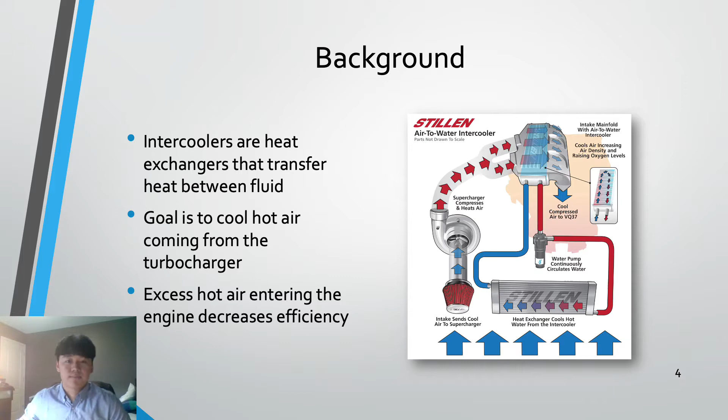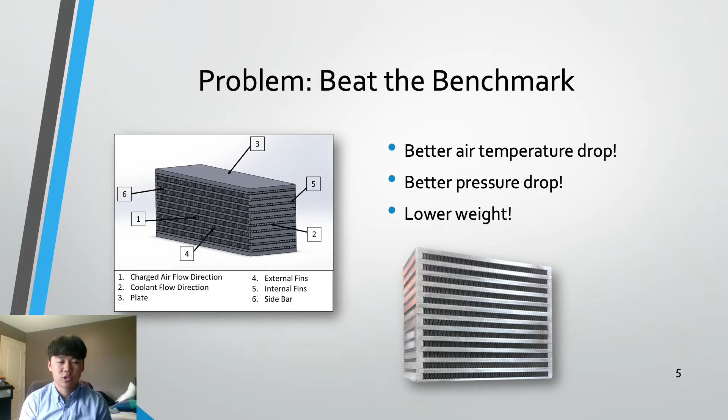The objective of this project is to beat the benchmark. We benchmarked an existing solution that's commercially available right now in the market, the conventional intercooler that uses bar and plate technology. Our goals are to design and manufacture an intercooler that can produce high air temperature drop, low pressure drop across the intercooler, and have a lower weight than the benchmark.

Additive manufacturing provides significant advantages in performance over traditionally manufactured intercoolers. In terms of manufacturability, 3D printing allows for much more complex design structures than what can traditionally be machined. Structures using lattices and other complex geometries like trusses, which have large internal surface area to volume ratios, can be designed and manufactured using 3D printing, and they increase heat transfer through a large contact surface.

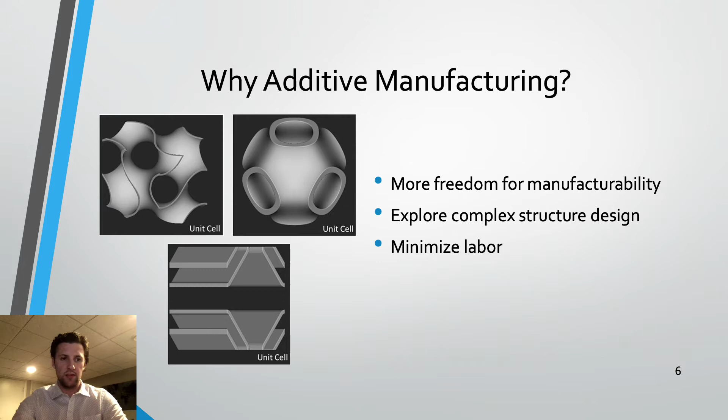The most important design considerations in our intercooler design began with the benchmark intercooler. First, the temperature drop in our intercooler had to be larger than the benchmark, and the pressure drop in the air had to be less than the benchmark. This was considered at every design decision.

The next consideration is that the intercooler must weigh less than the benchmark. Also, the form factor had to be standard, meaning the connections must be interchangeable for different vehicle requirements. Finally, and most importantly, the intercooler had to be designed for additive manufacturing, without any support structures. This last consideration is fundamentally where all the design decisions came from, and it allowed for a unique intercooler using a new technology to be designed.

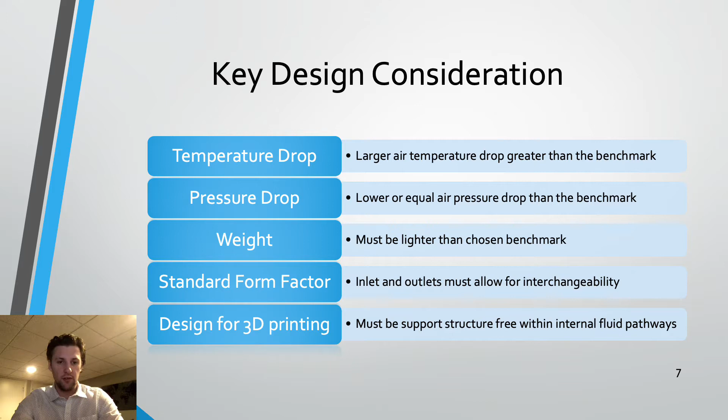Several standards pertaining to additive manufacturing and intercoolers were followed and considered in this design. The main standard followed was ISO 17296-3, which outlines common additive manufacturing processes. ISO/ASTM 52921, the standard terminology for additive manufacturing, was used in the reports, and the air side connection adhered to a turbocharger hose specification.

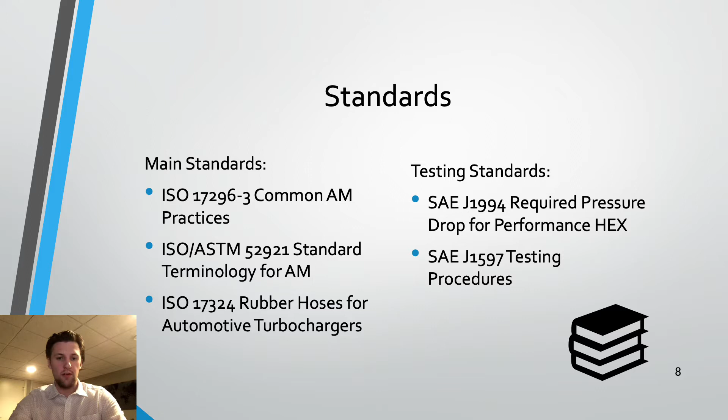On the other side, testing standards were not able to be followed, as Additive Solutions did not have access to any testing labs. However, if this intercooler is to be sold in the future or used in a vehicle, these testing standards must occur to certify the intercooler.

In our design, we explored three main concepts. These concepts are lattice structures built up of different complex geometries. The fluid would essentially flow through these lattice structures, and the complex geometries would allow for maximal heat transfer area between the two fluids.

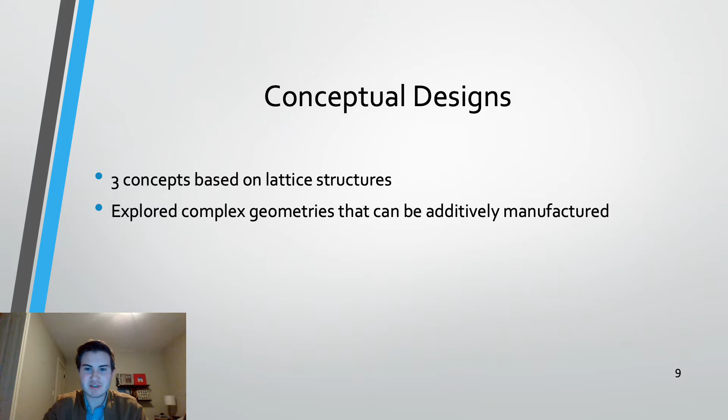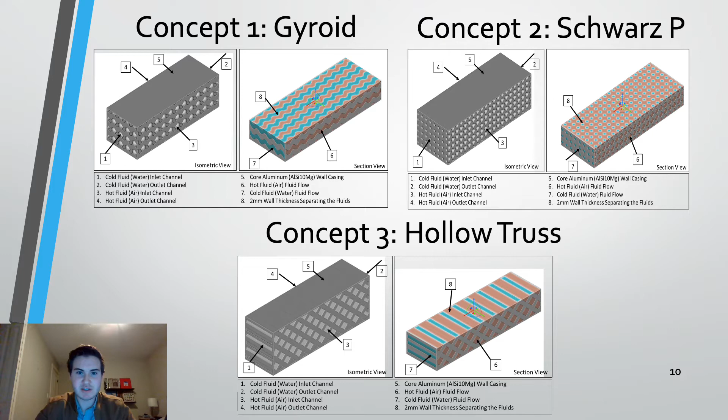These concepts are then compared based on the main performance parameters of our intercooler: the temperature drop in air, the pressure drop in air, the pressure drop in water, the weight, and the cost of each intercooler.

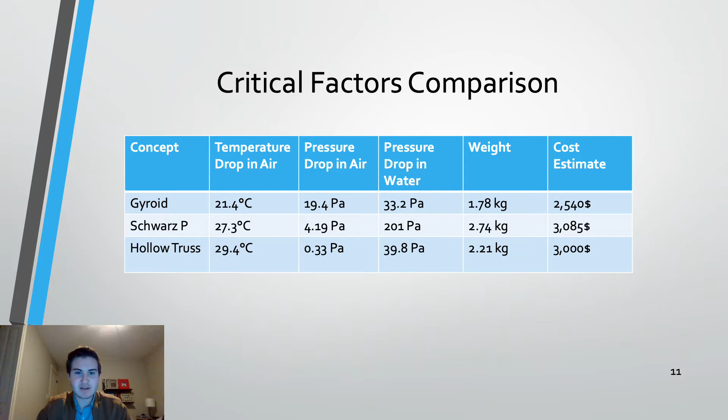These intercoolers were too big to perform computational fluid dynamics analysis on in the initial size we had them modeled in, so we decided to take unit cells of them to reduce computational time and power. The inlet conditions were kept the same, and they were all the same size. So these values are not indicative of an entire intercooler, just a unit cell, but they were good to compare the three concepts to see which performed the best.

Based on the performance parameters analyzed on the last slide, as well as other factors in our decision matrix, each concept received a score, which was tallied, and the concept with the highest score was chosen for our final design. If you'd like to look at the scoring of each concept for specific specifications, you can pause the video here.

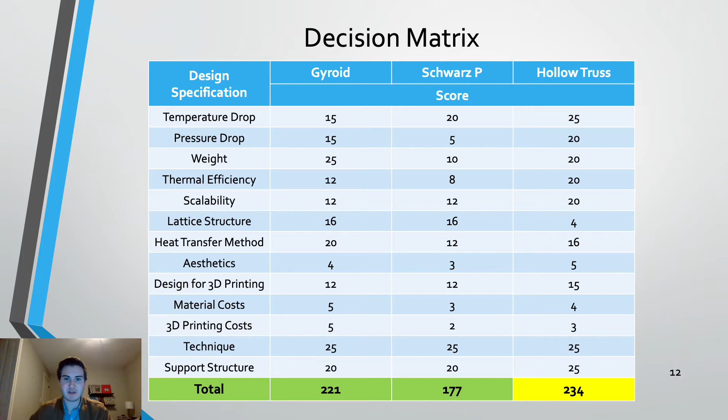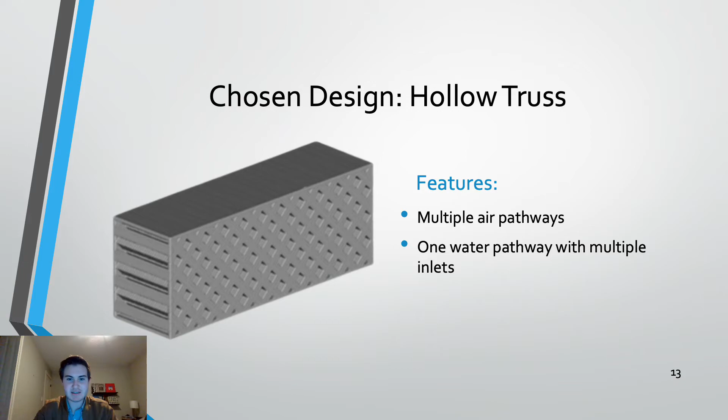Based on the scores given in our decision matrix, our chosen concept is the hollow truss concept. As discussed earlier, this concept features a cross-flow pattern where air flows through straight shot tubes surrounded by trusses, which have water flowing through them. There are multiple air pathways, but only one water pathway. Although this was our most simple concept, it scored the highest in the CFD analysis, as well as the other factors in our decision matrix.

The numbers for the benchmark were found in two different ways. First, Bell Intercoolers was contacted and they provided the size and results of one of their high-performance bar and plate intercoolers. To verify these numbers, Additive Solutions built a solid model matching the exterior size and dimensions of Bell's intercooler. Then hand calculations were computed on that model using the effectiveness NTU method. These calculations provided similar numbers to Bell, confirming the validity of those numbers.

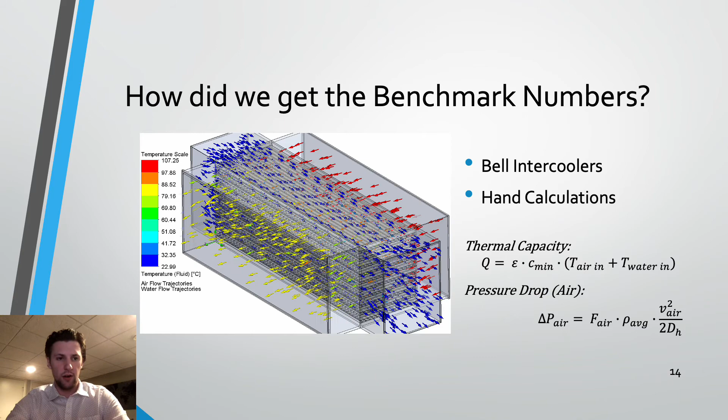From the benchmark calculations and Bell's simulation results, we found the air temperature drop was 61.1 degrees and the pressure drop was 2.61 kilopascals. The benchmark weighed 2.43 kilograms. This is the performance that we strive to beat with our own intercooler of the same size.

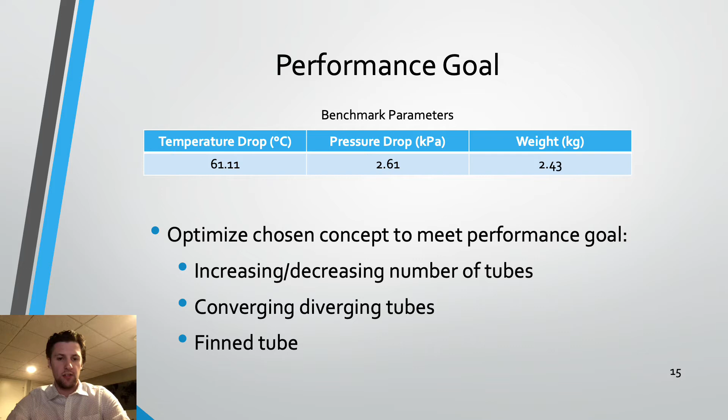To beat this performance goal, we optimized our design by changing the number of trusses for the airflow and changing the shape of the trusses, creating converging-diverging tubes as well as fin tubes in our design. These optimizations will be further discussed later in the presentation.

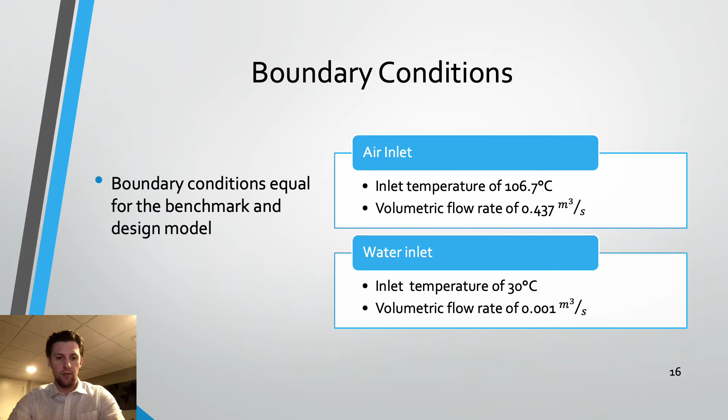In order to compare our intercooler design to the benchmark model, the boundary conditions were specified. To keep the comparison fair, the inlet boundary conditions were the same for both intercoolers. The air has a higher inlet temperature than the water because the water is cooling the hot air, and the airflow rate is a lot faster than the water's because the air is coming from a turbocharger. These conditions were also used identically by Bell Intercoolers in their results, keeping all comparisons the same.

In order to find the optimal sizing of the intercooler with the optimal number and sizing of trusses, iterations were performed on the basic model of our truss intercooler. The calculations were computed in MATLAB, and four input parameters were varied: the truss aspect ratio, and the size and spacing of the truss, for many different values across all four inputs.

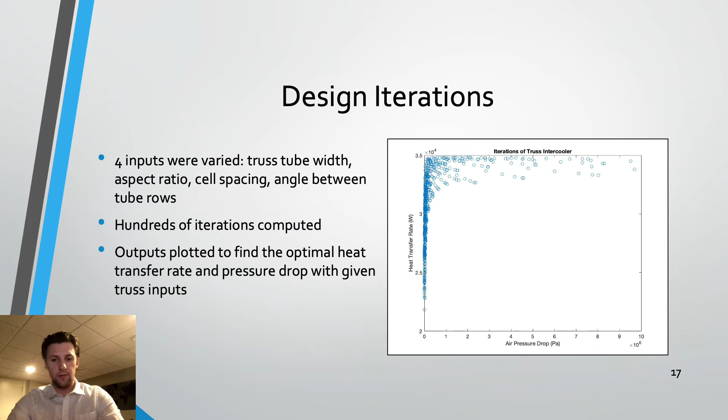The first iteration is a simple converging diverging tube. The second iteration consists of a converging tube but with an added fin inside. The third iteration consists of waves on the cross-section of the tube.

Finally, the fourth iteration consists of a converging diverging tube but with longitudinal waves along the length of the tube. These different models highlight the fact that it would otherwise be difficult to manufacture them without 3D printing.

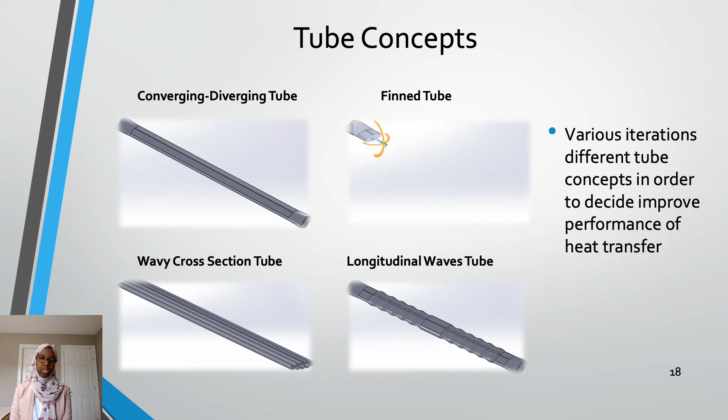Analytical solutions were not feasible to conduct on these models because of their complex shape. Therefore, CFD analysis was performed for comparison.

It achieved a temperature drop of 63 degrees, and therefore was incorporated into our final design.

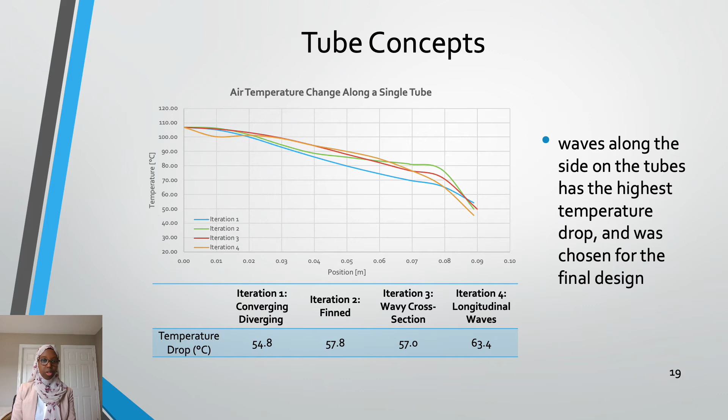Next, the pressure drop was evaluated. The transition from the inlets of the shell to the tubes creates a large pressure difference. This was minimized by incorporating converging diverging tubes into our design.

A separate CFD analysis was conducted comparing two scaled intercooler cores with the shell: the first core being simple straight tubes and the second being converging diverging tubes.

The distance between the tubes and the lengths of the tubes were the same as the optimal sizing obtained and discussed previously, in order to achieve geometric similarity.

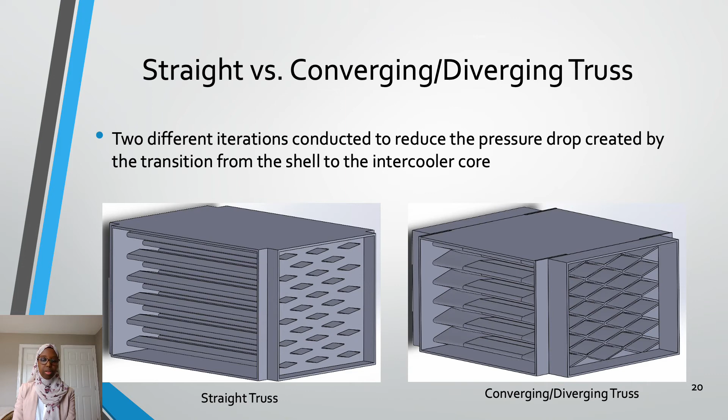From the analysis, it was found that the design with simple straight tubes had a pressure drop of 3.4 kPa, and the model with the converging diverging tube had a pressure drop of 3.2 kPa. A reduction of almost 8% in pressure drop was observed.

This validates that the converging diverging aspect of the tubes improved the pressure drop of our design solution, because it provides a smoother transition between the shell and the core.

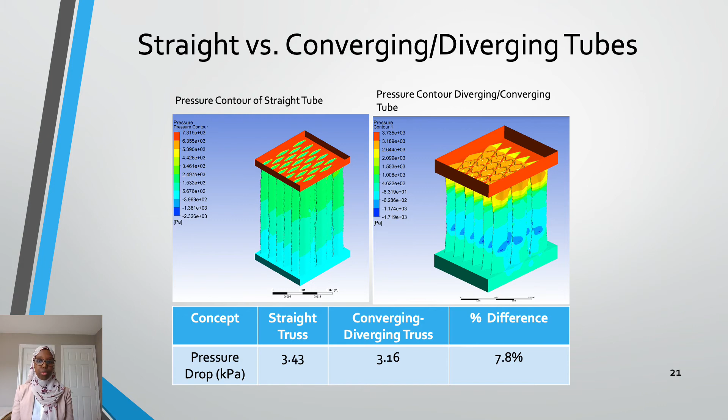This kind of design really shows the advantages of using additive manufacturing, where something like this would be very difficult or likely impossible to make using conventional methods. However, it's no problem for additive manufacturing.

We also tried to include a high number of these small tubes so that we can increase the surface area for better heat transfer. However, we also tried to balance that with having a large cross-sectional area to minimize the pressure drop.

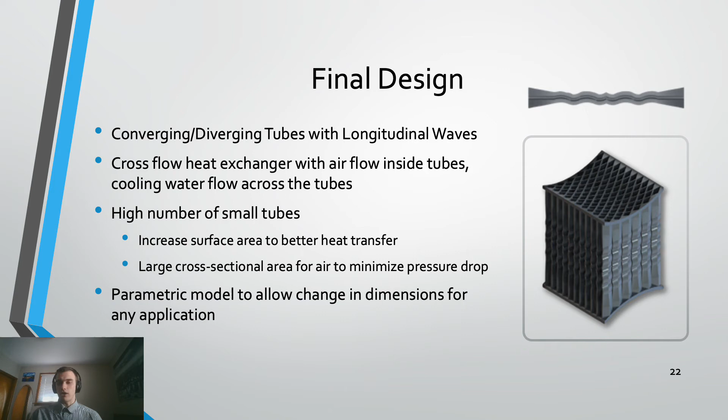A parametric model was created in SOLIDWORKS to allow a change in dimensions for any application. This video here demonstrates a cross-sectional view of our model in SOLIDWORKS.

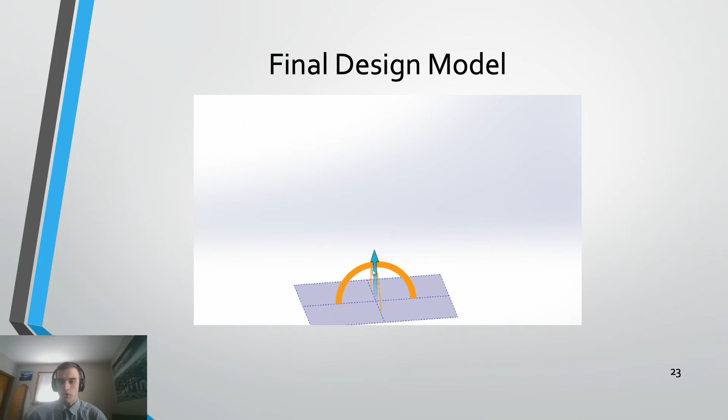As you can see, this is the direction of the print that would be printed with the 3D printer. At the start here, the air tubes are all converged together, and there's no space for water to go through. But as we increase in height, the tubes diverge, and water can flow through the tubes.

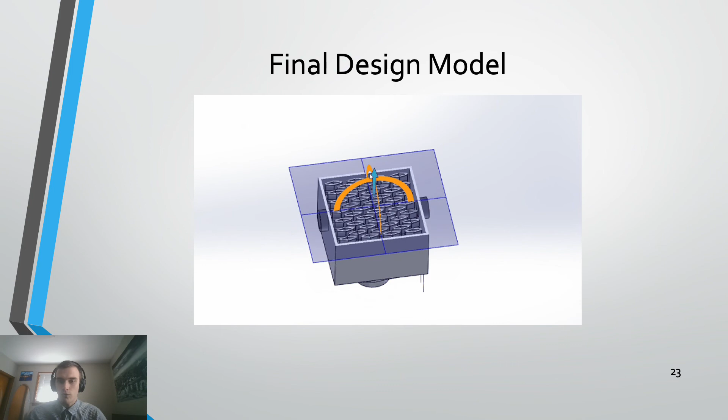Before they converge again near the exit, and then the rest of the shell is printed. So this is the direction in which the model would be printed, and it shows how the tubes are put together in order to make this model.

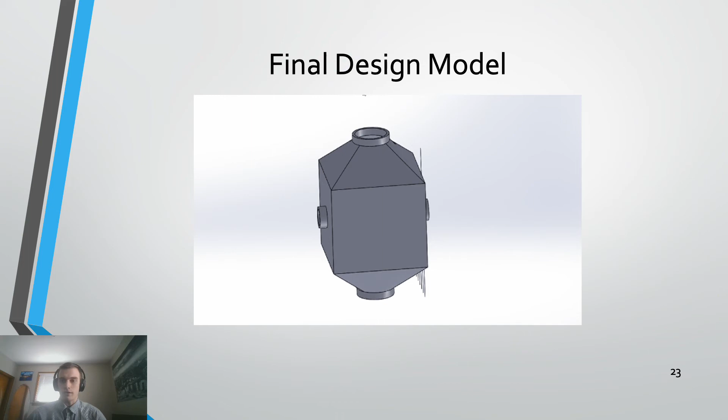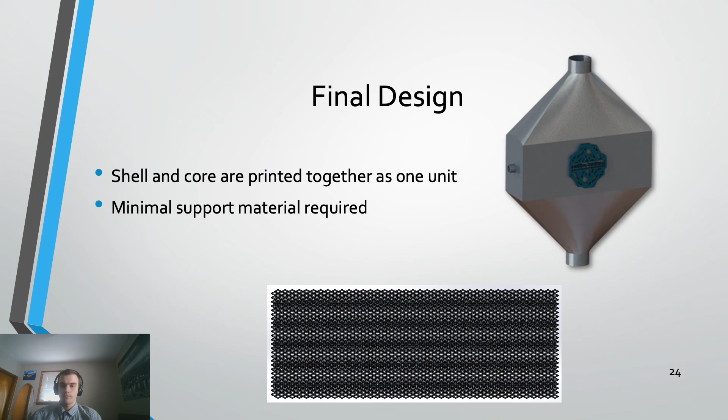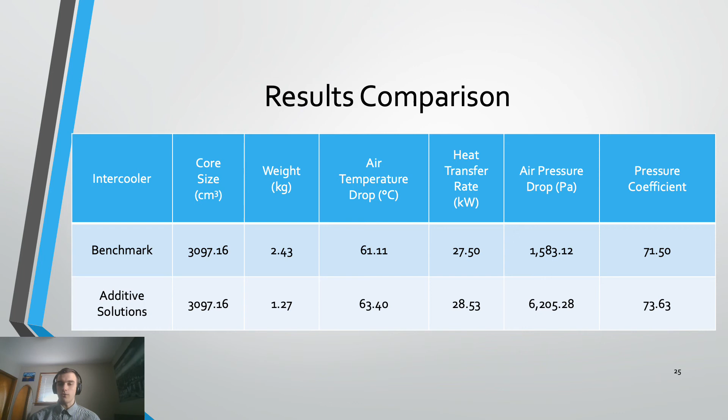Another important design consideration was to have common connections so our intercooler can be used as an aftermarket intercooler in any vehicle. Hoses and hose clamps are typically used as connections with intercoolers for the water and air inlets and outlets to be connected in vehicles. Our design will take this into consideration so that it can be interchanged in vehicles as a common intercooler.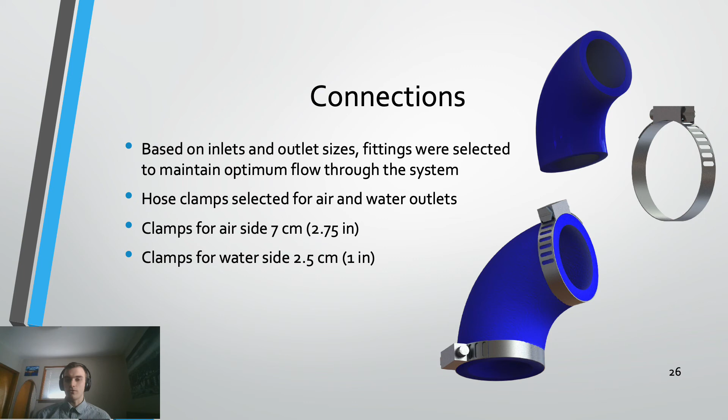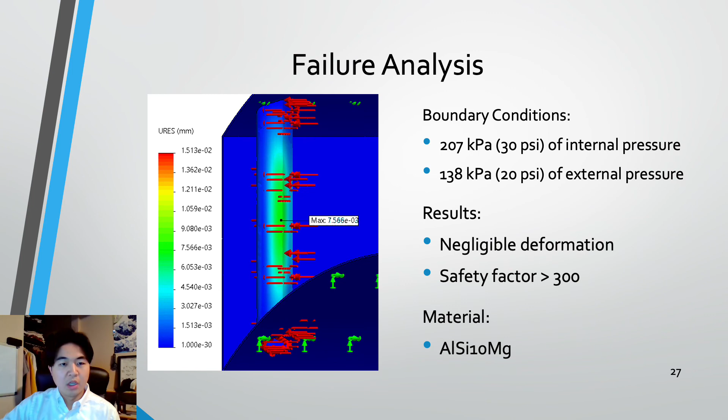A big factor as to why we get such a small deformation is due to our chosen material, aluminum silicon 10 magnesium, an aluminum alloy powder commonly used for 3D printing. The presence of silicon and magnesium makes the alloy stronger than pure aluminum. This material has a low density of 2.68 grams per cubic centimeter, which makes it a good lightweight option with a high thermal conductivity, ranging between 130 to 190 watts per meter Kelvin. It also has a high melting temperature ranging from 570 to 590 degrees Celsius, which are temperatures we do not expect to reach for our intercooler.

The costing of the part is a summation of the machine or printing cost and the material cost. The print time is estimated to be 33.6 hours charged at $75 per hour. The material cost ranges from $80 to $120 per kilogram. We estimate on the higher end of $120 per kilogram, giving us a total cost of roughly $2,600.

This is a fair estimate, as our client expected the cost would be marginally higher than the traditional aftermarket intercooler. However, this is not too much more, as typical high-end intercoolers available now range from $1,500 to $2,000. And as stated before, our intercooler design is almost half the mass of our target benchmark.

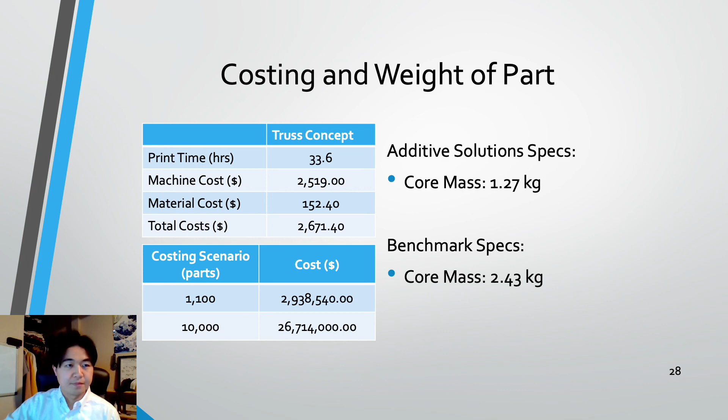The nature of our project actually sets us up very well in terms of sustainability. Recently, we learned in class that additive manufacturing could reduce energy usage by 50% and reduce material costs by up to 90% compared to traditional manufacturing.

Aluminum in itself is also a highly recyclable material. Currently, 65% of America's aluminum is recycled, and approximately 90% of aluminum found in vehicles is recycled. Also, when you think of frequently replaced car parts, it's usually things like spark plugs, tires, or belts, as these parts wear out faster. Generally, one would only need to buy an intercooler once to reach their performance goals and stick with that one intercooler for the lifetime of their vehicle, unless they want to upgrade.

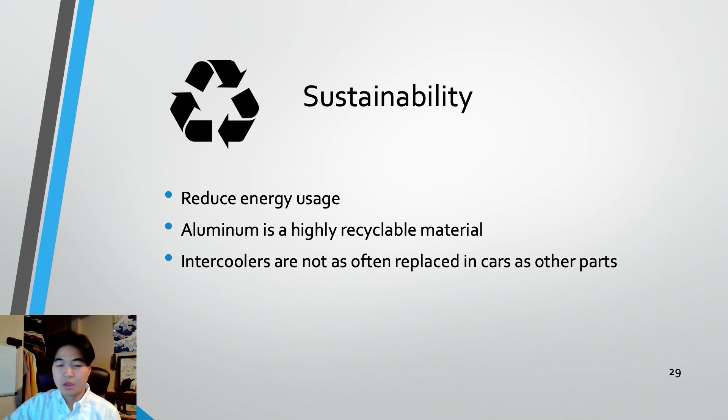As for our team's next steps, we would first like to try and improve on the pressure drop specification, if time permits. We would also like to finalize the design connections on the shell. This will just consist of adding a lip around the connections to help secure the hoses and hose clamps. We also hope to print a small-scale model for our client, Dr. Kreshe, to run some experimental simulations on.